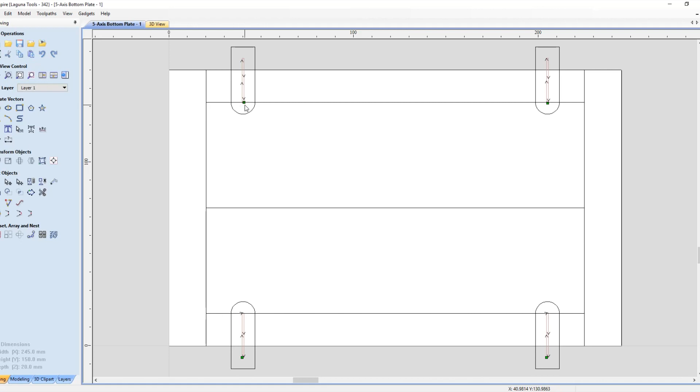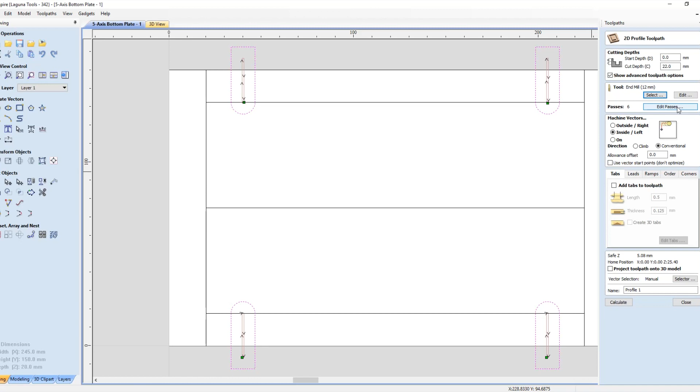That allows me to select my tool that I'm going to use. And I selected a 12 millimeter end mill. All right. And it said it was going to do it in 6 passes. And I thought, you know, I'm not in a hurry here, so I want to edit that. So I told it, let's do 1 pass per millimeter, 22 passes in total. All right, and set that up. And so that'll give me the, let me pin this. That'll give me the 22 passes on here.

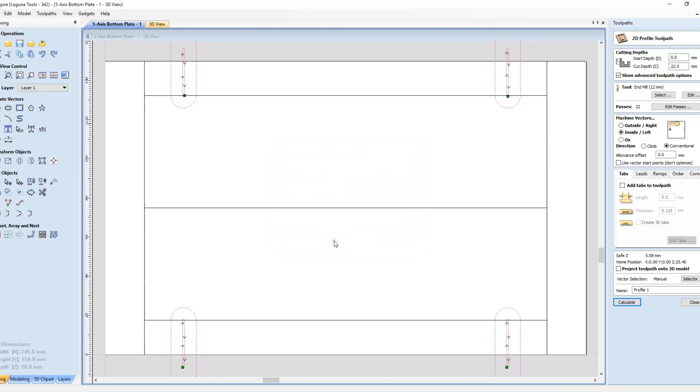I want to cut inside these lines, so I tell it to calculate. It's warning me that it's going to cut through the material. And so now it's generated the tool paths for me. And I want to verify that they look good, so I am going to tell it to preview all tools. And I've got it slowed down just to kind of show you what it should be doing.

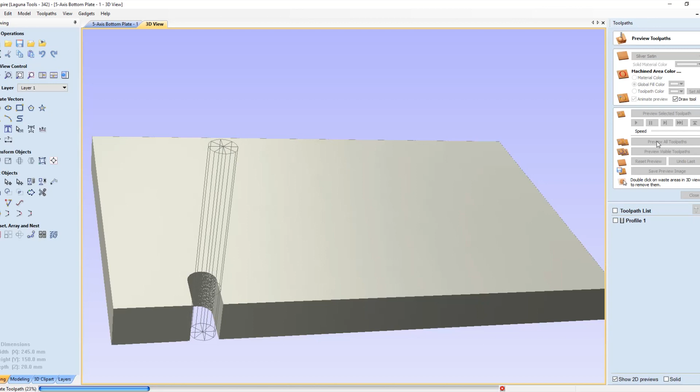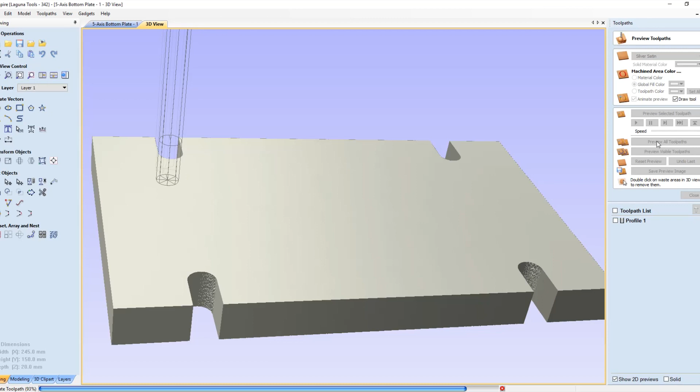So it's making a movement. It's cutting on one side, coming around and cutting on the other. And it should not touch both walls at the same time, so I should get a good clean path using conventional cutting, which should eject the chips pretty well. And once that's done, I'll be ready to bolt this back onto the table section and then bolt the table section down. And as I said, I could have done it more aggressively, maybe 2.5 millimeters per pass. But I've been out of practice with machining heavy aluminum, and I didn't want to take a chance on messing it up. I'm not really in that big of a hurry, so there we go.

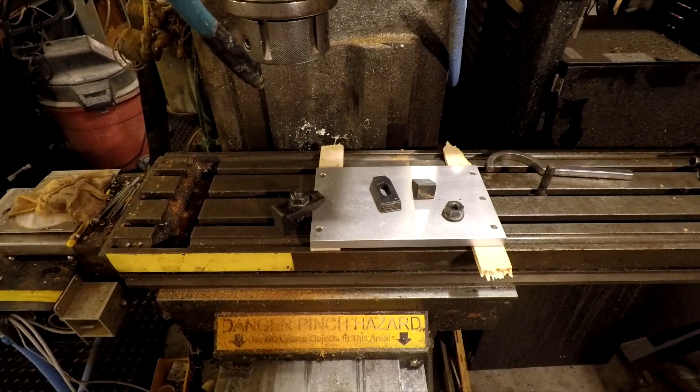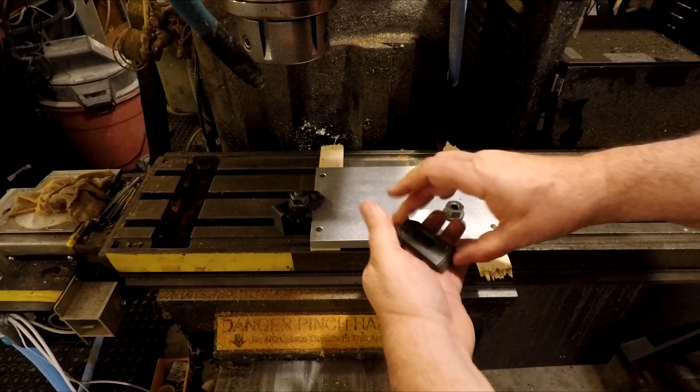Now, first thing I need to do is I've got this plate fairly lined up. It doesn't have to be like down to 1/1000 of an inch. I'm just cutting some slots in there. The next thing I need to do is make sure that it doesn't move. And if you haven't seen it before, these are the parts of a clamping kit. So there's a T-slot nut, which looks like this. It goes into the slot

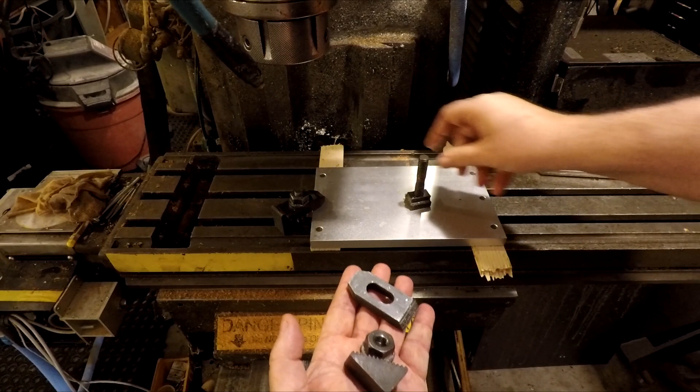like this. Then the next thing that we have is the little staircase. It sits like this. Then this bar sits on top of it like that. And you always want to make sure that the bar is slightly facing downward. Then you put the nut on there. And you tighten it down. And I need to raise this up a hair. There. So now the force is downward. Okay. So I've got my wrench. And I'll tighten them down evenly.

Alright. So now it's not going to go anywhere when I'm cutting into it, because I'm going to be cutting a slot here, here, here, and here. So the next thing I need to do is I need to align my tool with this corner. So I'm going to go do that next off camera.

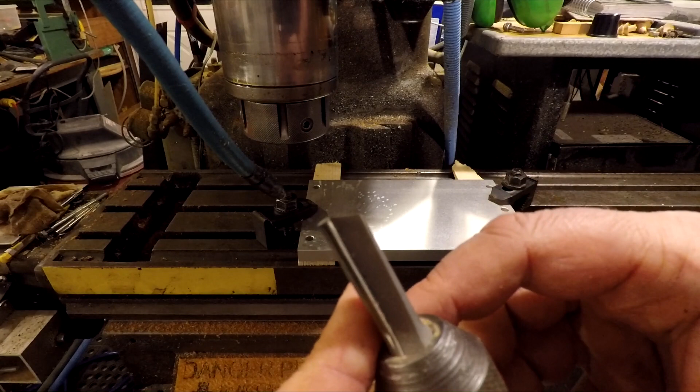I don't mind telling you, I've been cutting with little 2 millimeter bits that are about like that big. And this thing here is a razor sharp single flute 12 millimeter bit. It's just freaking scary, man. So it's been a while since I've cut big stuff. So, but gotta be done.

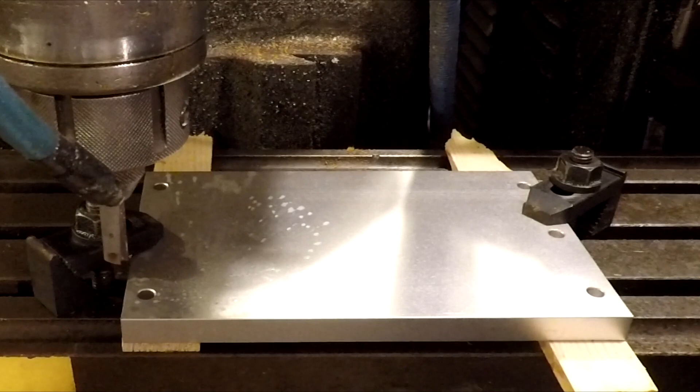So now what I got to do is I've got to set the 0 on this Z-axis. So I'm going to bring it down a little bit. That should be good. I'm going to touch it off to 0. And then I'm going to raise the table up. And that's how I'm going to set my 0 point.

Alright, so I've got my mist coolant ready. So that'll keep it cool. Bring that down and put it close. I'm going to set the feed override to about 30%. I'd rather do it a little bit slow and ramp up speed. Put my hand over to E-stop and rock on, baby.

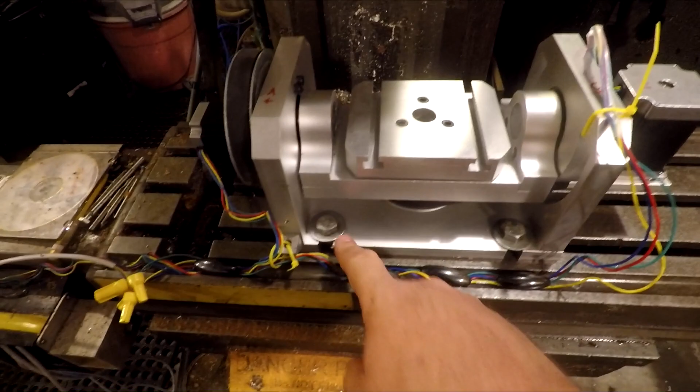This is enough for tonight. I've got it mounted down here. It is not going anywhere. And I had some little magnets, so I stuck them in here to hold the wire down. It's kind of crazy, but it'll work, at least for now. So that's it for this video. I'm going to come up with something that I can machine, and we'll see where that takes us.